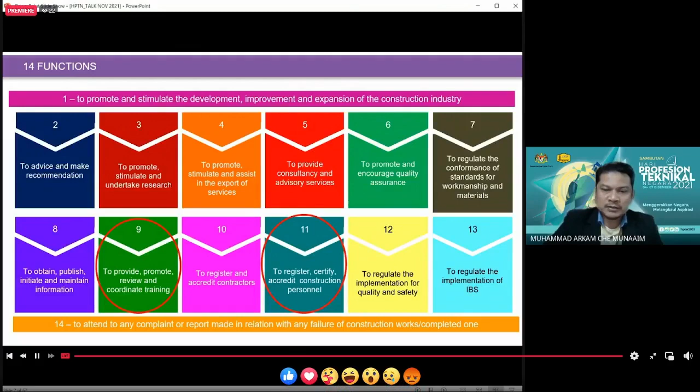Besides the other 14, you can see here the first one is to promote and stimulate the development, improvement, and expansion of the construction industries. And the last is actually to attend to any complaint or report made in relation to the failure of completed construction work.

So we've got item 9, or function number 9, and number 11 as part of our commitment today on this talk.

The amended elements from this Construction Act, Act 520, cover contractors' registration, accreditation, enforcement structure safety during and post-construction phase. Construction personnel covers registration, certification, and accreditation of construction personnel, and also construction materials.

So we look into these three important stakeholders or players in the construction industry: the contractors, the personnel, as well as the materials. We have this in the law so that CIDB can have a focus on looking into how the construction industry will be taken care of.

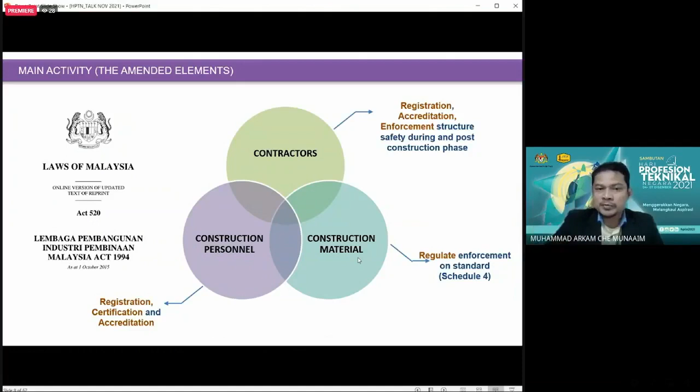By these three important elements: to take care of the contractors as well as their performance, to take care of the construction personnel through accreditation, registration, certifications, and to take care of the material by regulating the enforcement of standards, especially from Schedule 4 of Act 520.

Important snapshots from the Act. So to start, we should look into the meaning of construction works according to the Act, because we need to specify or deliberate the wording or the sentence very well.

So according to the Act, construction works means the construction, extension, installation, repair, maintenance, renewal, removal, renovation, alteration, dismantling, or demolition.

So demolition is also considered construction works according to the Act, of any building, erection, edifice, structure, wall, fence, or chimney, whether constructed wholly or partly above or below ground level. So whatever we construct fully or partly below or above ground level is considered construction work.

Any road, harbour works, railway, cableway, canal, or aerodrome; any drainage, irrigation, or river control works; electrical, mechanical, water, gas, petrochemical, telecommunication works; or any bridge, viaduct, dam, reservoir, earthwork, pipeline, sewer, aqueduct, culvert, drive, shaft, tunnel, or reclamation work.

And it also includes other things, which are any works that form an important and integral part of the preparatory or temporary works, as described in paragraph A to E before.

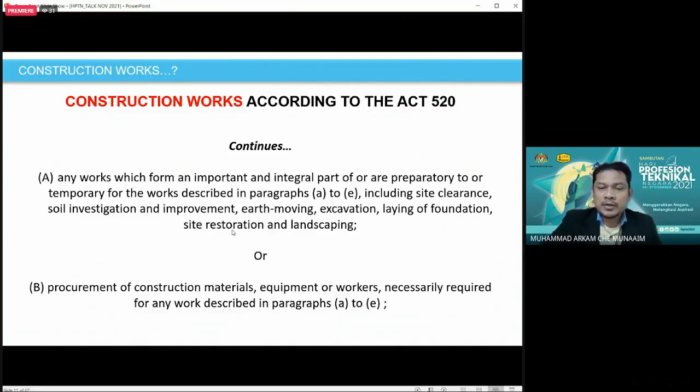We need to understand this very well, because some of us sometimes don't realize this is actually construction work. 'I don't do any new construction, I just do renovation' - renovation is also construction work. 'I don't do any construction, I just do dismantling work' - dismantling is also construction work. 'I don't do construction, I'm actually a maintenance man, I do FM, not construction' - FM is also considered construction work. Maintenance is stated here - either you go for repair, install, or maintain, it's also considered construction activities or construction works.

That is why in construction or in the CIDB program, you can see two main infrastructures being prepared for construction personnel as well as FM personnel. I will show you later in this slide, and we will also keep informing you about these programs.

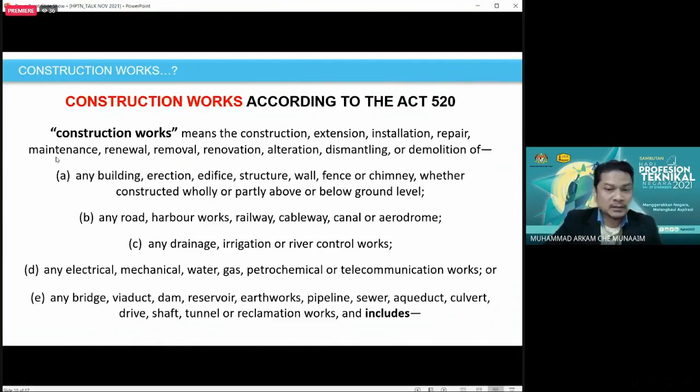So construction works means all those. Hopefully this can now be understood by everyone, that construction work is not only what we think - the definition of construction activities or construction works according to the Act is different. So we need to take care and understand all this.

Okay, then we go for construction personnel. What is actually construction personnel from the Act? The construction personnel definition from the Act includes general construction workers - we can see them on site. Semi-skilled construction workers or skilled construction workers are considered construction personnel.

Construction site supervisors, who are actually supervising the works on behalf of the contractors, and their superiors, which are the construction project managers, as well as any other employee in the construction industry as may be determined by the board. So we have another term - construction project manager.

This means any employee possessing the accepted level of skill, knowledge, and experience as may be determined, who is assigned to the construction site or any other such place to organize, plan, control, and coordinate the construction work from inception to completion. So the person who looks after the project from inception until completion, who manages the project, becomes a construction manager or project manager, considered a construction project manager according to the Act.

We also have another important definition for construction personnel, which is construction site supervisor. This means any employee possessing the accepted level of skill, knowledge, and experience who is assigned to the construction site or any other such place to supervise the construction work.

So people who are supervising construction activities or construction works are considered construction site supervisors according to the Act. If we do supervision work on site without registering with CIDB, there is actually a contravention according to the Act. We will look into that definition later.

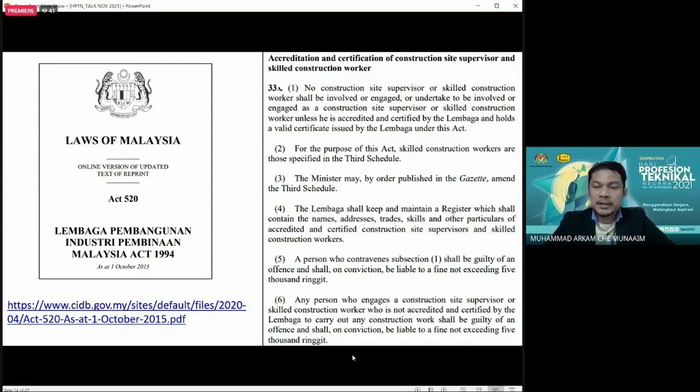So now, once we understand there is actually a definition of construction works or construction activities, definition of construction workers or construction personnel, definition of site supervisor, definition of construction project manager, and definition of skilled workers, we now understand that in construction we have some arrangement or hierarchy in the standard construction team.

So who is actually the standard construction team here? Definitely, we can say there are three main important agencies or stakeholders: from the client side, from the consultant side, as well as the contractor side. So these three C's - client, consultant, contractor - are the minimum that should be fairly and extremely understood by our construction personnel.

So who is the client? The client will prepare the statement of the program. They will prepare what they need, how they need it, and what feasibility studies have been conducted to start off the project. So they will determine, identify, and describe their needs.

The needs from the client will be picked up by our consultant to do their design and coordination works, and specify the scope of work as well as the specification of works, based on the needs as well as the financial budget of the project. Once we have budget and needs, then we can do something.

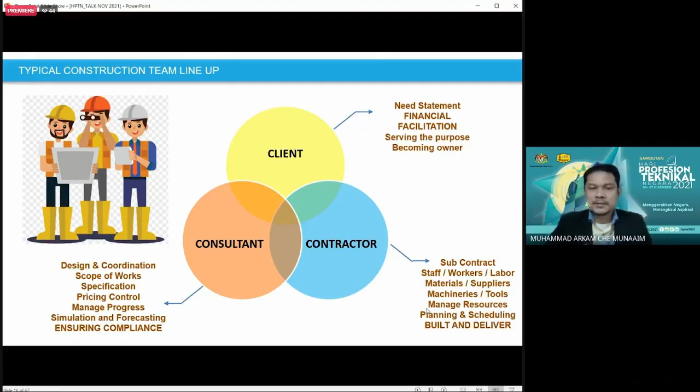So basically, the standard fundamental setup of the typical construction team lineup is shown in this slide. What is the consultant's scope of work, what is the contractor's scope of work, what is the client's expectation scope of work that we need to understand before we go into their personnel. So how does this go from here, in terms of education level.

If you can see here from this table, I've copied the scope from before. The consultant's scope is governed by the Board of Engineers Malaysia, and other boards as well, the Board of QS and the Board of Architects. They will do the design, coordination, scope of work, specification, pricing control, manage progress, simulation, forecasting, ensuring compliance as I've mentioned before.

The scope of work of the contractor covers subcontracts, staff, worker level, materials, suppliers, machinery, tools, managing resources, planning, scheduling, and build and deliver. So we have two scopes of work coming together to be aligned on site, so that the work can be monitored and progressively attained by these two main important parties, besides the consultant and the client.

In our system, you get the engineering diploma for example through the Dublin Accord, EAC - Engineering Accreditation Council, or the Engineering Accreditation Department of the Board of Engineers. Basically, they are on the inspectorate scope of work - they inspect the work done.

From this point of view, the engineering diploma holder who works with a consultant will look into compliance matters. That compliance aspect needs to be trained - how do you know this is compliant, how do you know this is non-compliant, how do you know this is standard or non-standard. Basically it comes through experience as well, on how to understand the scope of works, how to measure the compliance of what's been constructed, and how to evaluate the materials proposed by the contractor, for example.

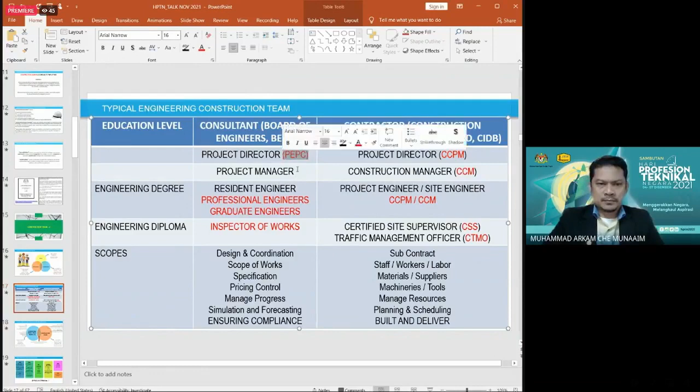Okay, let's do this. So PE, PEPC, and then become PEPC. If they are still in the construction line for mechanical, electrical, civil engineering, they can become the PEPC later. So this is the arrangement.

If you understand this, I'm quite sure you will know what is actually the thing that we are now proposing. Actually, in this talk, we want to know what is the function of these two.

I just repeat the previous two slides on the design coordination works from the consultant's scope, and then the contractor will be on the contract to deliver, while the consultant ensures compliance. There's actually an overlapping scope of knowledge between these two.

We understand how the contractors work, and the contractor also understands how the engineers work, the consultant work. So basically, we work on the same project, we work on the same setup, even though our function is different, but the job goal is the same. We both want to complete the work, we both want to hand over the project successfully, we both want a good remark from the project we have completed. So we have the overlapping scope and knowledge between these two, the consultant and the contractor.

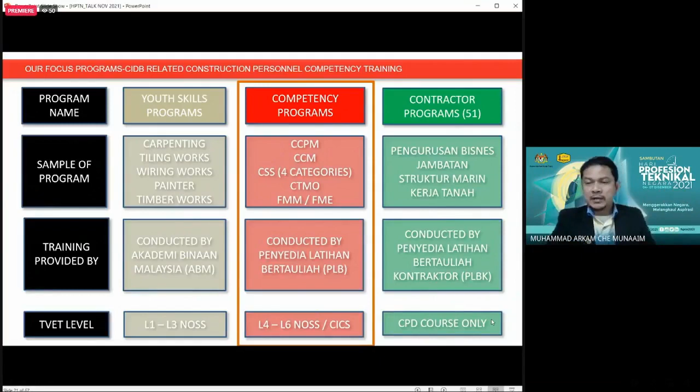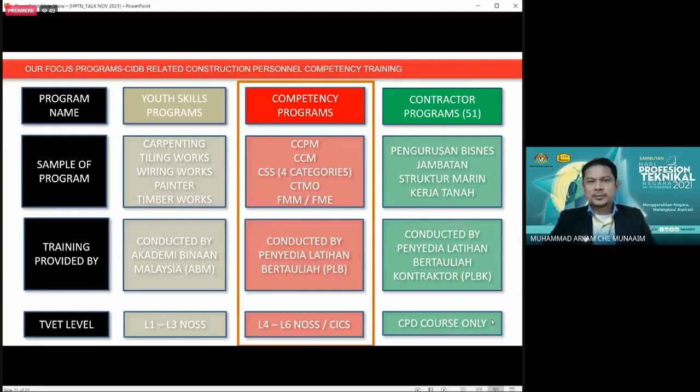This is just a CPD course, as well as the course that requires them to be registered as a registered contractor to do the specified work. Another one is the normal training, conducted by many, including universities and penyedia latihan bertauliah, and other individuals also conduct it. They can apply for CPD from the CIDB and then conduct the normal program. So there are 4 types of programs under CIDB's activities: youth skill program, competency program, contractor program, as well as normal CPD program.

So here, the competency program, we will talk more about this today in this session.

Okay, Supervisory and Management Competency Division, located at level 35, World Trade Center, PWTC before, in KL. Their activities include policy, SOP, rules and regulation for construction personnel, training provider and session accreditation, producing standard modules and assessment scheme development, training and assessment, certification through skill competency kemahiran pembinaan SKKP level 3, 4, 5 and 6, and recognized programs. So part of CIDB's work is also to recognize programs.

Competency level starts at level 1 and 2 as skill traits level, listed in Schedule 3, about 25 programs altogether. We have programs at the next stage too. From here, they will be awarded level 2 and level 1 only, normally conducted by ABM.

The second level, level 3, is trade supervisor, where they can monitor the work among this. In this list, they have one trade supervisor to monitor the work. They will be level 3 supervisor, trade supervisor, with pengkhususan or specialization derived from 4 main supervisor categories: mechanical, electrical, C&S, and building and architecture. There we go, we start for supervisory level.

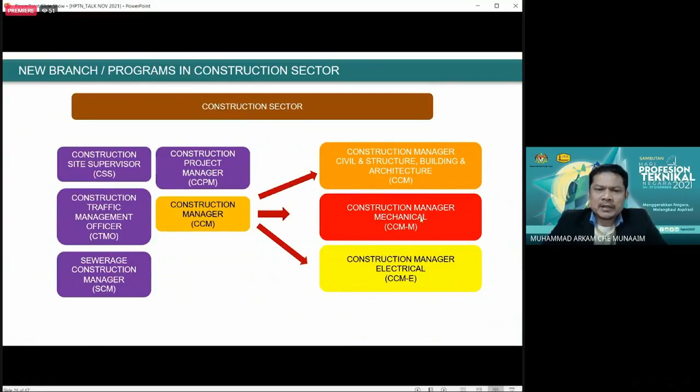Okay, so we have level 4 here, certified site supervisor, CTMO, as well as a sewerage construction manager. Later on, they will become CCM. We've got three other specialization areas for CCM: normal CCM, which is C&S, B&A, and also mechanical as well as electrical. So they go for project manager, CCPM later.

Okay, this is for FME. FME, I need to skip there.

Okay, this is the framework of the current program identified in CIDB. First of all, we have level 4, this is what we conducted. Level 4, CSQF, Construction Skill Qualification Framework. Level 5 as well as level 6, Certified Site Supervisor CSS has 4 categories, FME 1 category, and also CTMO has 3 programs at level 4, 2 programs at level 5, and 1 program at level 6.

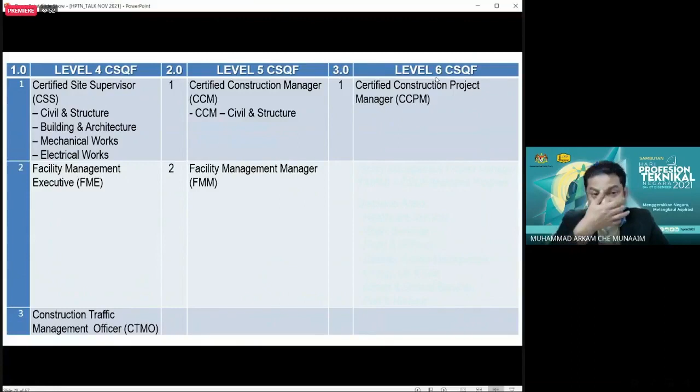So, Facility Management Manager, and as well as a Certified Construction Manager CCM level 5. So then they can go for level 6, which is CCPM.

Then how does the assessment get made? So it's an outcome-based program. What is the outcome-based program? It's basically a program derived or prepared in terms of competency standard.

How does CIDB do the assessment based on the outcome shown through either of three methods? Method 1 is on the class as well as the assessment. Method 2 is 3 hours written examination. Method 3 is about 45 minutes to 1 hour interview session.

So they will snapshot the outcome that you have experienced before through this outcome-based program process.

Expected attributes from all construction personnel. So this will be derived from acts and regulations, objective, mission, and vision of CIDB standard, being either NOSS or CICS, as well as the modules developed by CIDB.

And program and learning outcome mapping, we have cognitive, psychomotor, and affective domain - KSA, knowledge, skill, and attitude. They've been put into the modules and also the curriculum so that we can see very well what is actually the expected knowledge that needs to be prepared by the candidate.

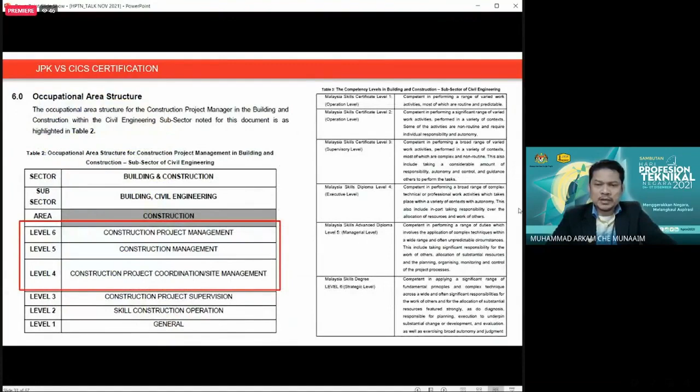Okay, we can go through a little bit faster. This is NOSS. We'll share the slide as well, and the video also will be shared through other platforms, so no worries, you can come back to it later.

The acronym NOSS, National Occupational Skills Standard, is defined as a document that specifies the competencies expected of a skilled worker who is gainfully employed in Malaysia for an occupational area and level, on a pathway to achieve the competency. They can climb up from level 1, level 2, level 3, level 4, level 5 in the NOSS standard.

The same standard has been adopted by CIDB and become their own standard, or they produce their own standard from the previous standard developed by JPK, which is CICS, the Construction Industry Competency Standard. For construction personnel, it's developed to specify the minimum level of competencies for the Malaysian construction industry. CICS is defined as the specification of competency expected of construction personnel employed by a construction project organization to effectively manage construction projects.

So CIDB does this: getting the spec, or NOSS, the occupational skill standard, and then applying it into the construction industry. They might produce their own CICS, or produce the CICS by their own, not using JPK NOSS anymore, because CIDB has the source of power to develop their own standard.

So their standard is named CICS, Construction Industry Competency Standard, and the framework name is Construction Skill Qualification Framework, CSQF. This is the document that specifies, describes, and tells us what competency level you are attaining, based on the level described in that documentation.

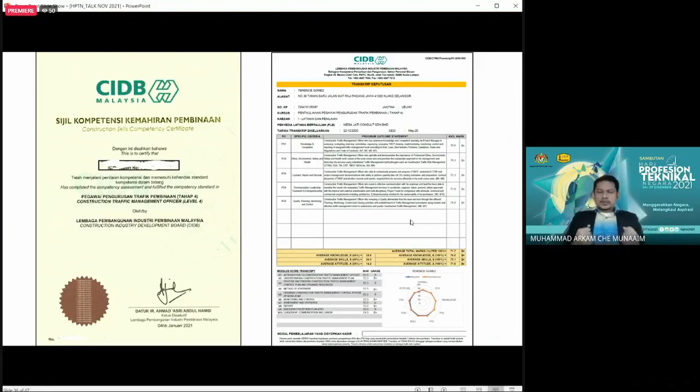We also have the outcome. The program outcome is stated here. We've got PO1 up till PO5 describing our character. PO is important to describe the character of the candidate—whether you fit that character, or need a little more time to polish up and attain that character. The character also comes with describing the character through PO, which also leads to the learning outcome you should attain through your training program.

Another certificate, from level 5, construction manager, CCM. We have more POs here—just 5 POs in the earlier one, but here we've got 8 POs altogether. Below is indicating the competency level from the baseline as well as the construction attainment.

How did he score from either of the three methods? Method 1, method 2, or method 3—all will be described through this spider web, showing our strengths and weaknesses in attaining or obtaining through this assessment system. That is why I can say the CIDB program is a little bit more advanced compared to other agencies that I mentioned just now.

A little bit advanced, because they can probe you in what area you are good, and in which area you need to come and get a little bit more polish. CIDB also allows people to come for assessment through method 3, which is just an interview. From the interview session we can map these things up and generate a spider web to tell you your competency level and how you want to proceed.

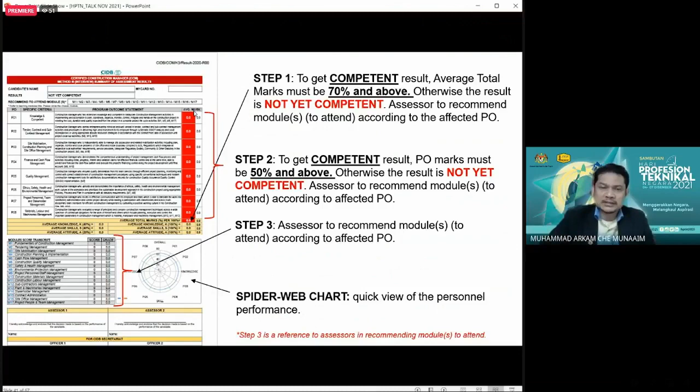Not yet competent means there's something you need to polish up. You polish it up, and then you can come again for another assessment in order to get a passing or competent result.

I want to touch a little bit on this. From the module names, construction site supervisor has 8 modules. Construction manager has about 17 modules. CCPM has about 16 modules altogether, now become 17. This shows us the job responsibility, in order for us to understand our job function on site.

This is a comparison table, just for illustration - what is the CSS job function, the important responsibility factors of CSS, CCPM, and CCM. The lesser value means less responsibility - for example, business continuity, sustainability and entrepreneurship.

Of course CSS won't look into this so much. The person who needs to look into this is the CCPM, because they need to ensure business continuity after completion of the work, for example. Site team, workers control, subcontractors and supplier - the CSS will look into it a bit more, about 35%. The construction manager will look into it a little more, but the CCPM will look into it a little less, because this isn't their main job function - organizing the site team, workers control, subcontractor and supplier is more the CCM and CSS's role. So this is how we read the chart.

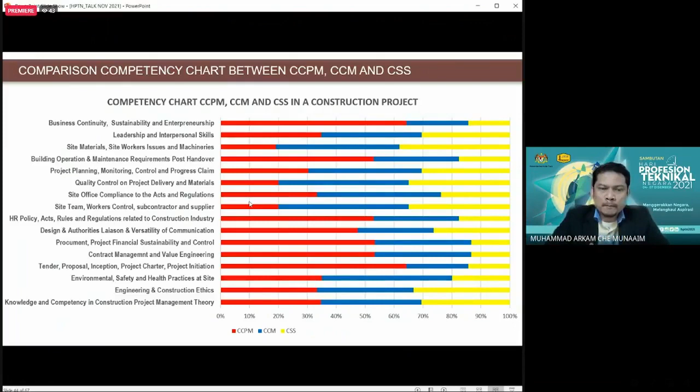How do we prepare for the world of work? We know that Tred Pembinaan, or construction trade, is actually the main stakeholder or operator, which is CIDB Malaysia under the CSQF.

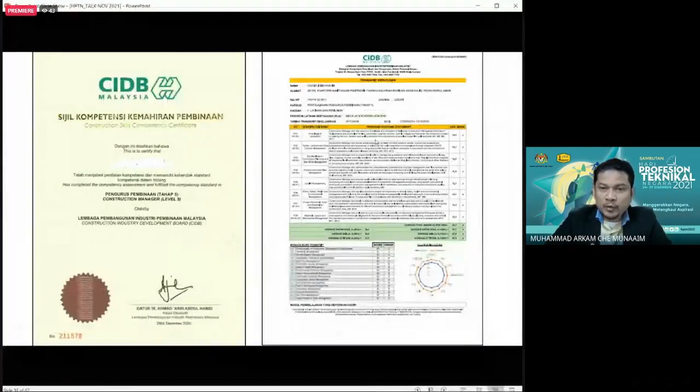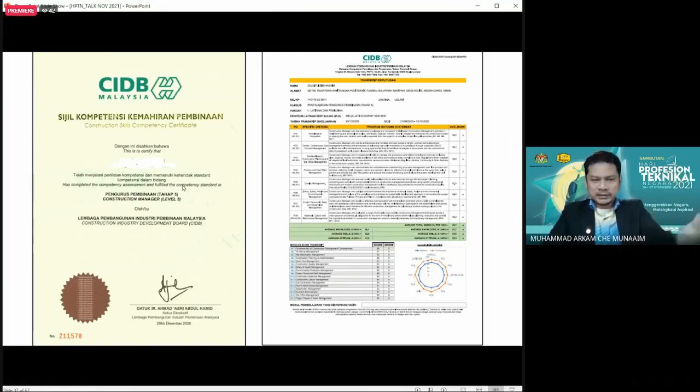The program outcome is actually describing the character or knowledge that you should attain. So when you bring this level 4 or level 5, for example, to other countries, they can say you are actually able to do this, able to do this. That is actually the idea.

The whole framework, when it talks about the internationalization of the program, we are actually exporting our experts to other countries, as well as within Malaysia and internationally. So that is the framework. We can understand their skills by looking at their competency level. Level 4, you should be able to do this. Level 5, you should be able to do this. Level 6, you should be able to do this. That is actually the idea.

So if we have that in mind, we can understand that now we are at level 4, this is what we can do. The same goes for people coming into Malaysia - we can understand they can do things based on level 4 credentials, they can do things based on level 5 credentials. That's the kind of framework you need to understand.

That is why the program developed by CIDB is very important for the local market as well as the international market, and is a very standard program being mapped and developed through comprehensive attainment. They look into all angles just to produce a competent person, either through method 1, method 2, or method 3.